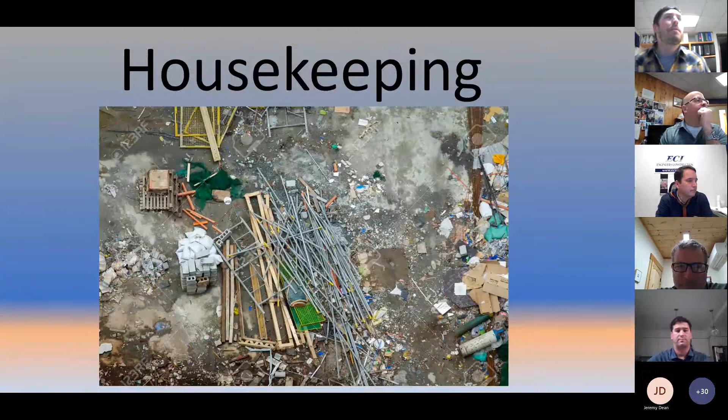I'm talking about housekeeping today. Poor housekeeping can result in tripping over loose objects on the floor, stairs, platforms, or ground. You can be struck by any falling objects that are just laying around above you. Again, slipping on wet surfaces - greasy, wet, dirty.

Poorly stacked items or misplaced materials can start to build up. If we get right now, this time of year, we could get a foot of snow next week. So if you have stuff all over the job site and it's a mess right now, and it snows on it, it's going to become pretty dangerous because you can't see what's under the ground, under the snow. It's also going to be challenging to find materials and tools and things you need because the snow is just covering it up and you're unsure of where it is.

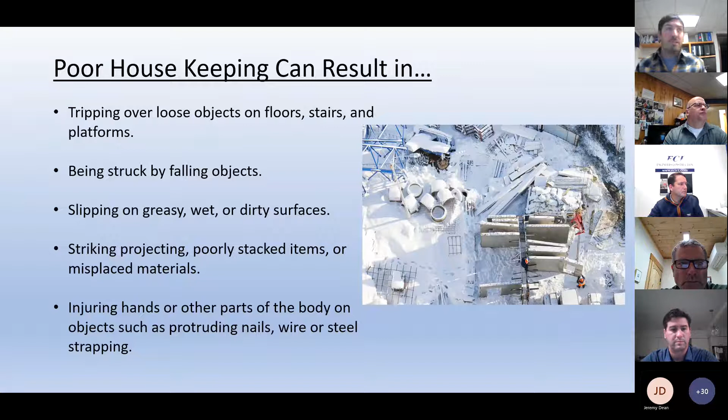Benefits of good housekeeping: you're going to need to handle materials less, you're not going to be searching around looking for things, you're going to know where they are. There will obviously be fewer slipping and tripping accidents because the ground is clean.

Fire hazards decrease, dust and vapors decrease if the ground's cleaner, the floor's cleaner. It's going to allow you to use the available space more effectively, and your tools and materials will become easier to find. It's also going to improve morale and productivity.

You're not going to spend time searching for things. You get to show up at the job site in the morning and be like, oh, it's nice and clean around here now, I like this. I kind of want to work here right now.

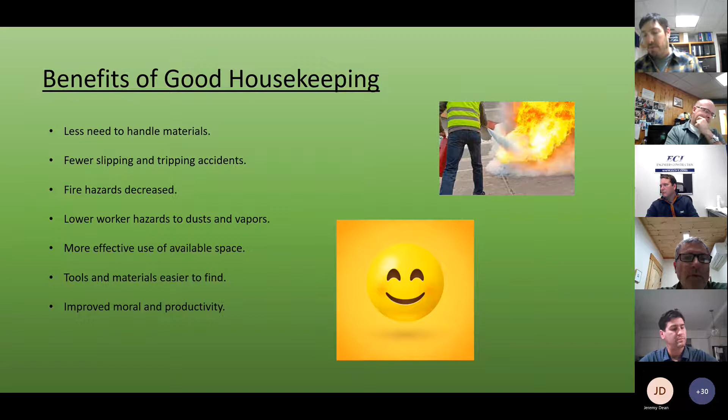Implementing an effective program, or just keeping the job site clean: clean up during the shift. If you're going to lunch or something, look down, you see some junk, some trash, just pick it up on your way and throw it in the trash bin. Things like that. Day-to-day cleanup - towards the end of the day, take a little time, everyone clean up a bit.

Make sure you have a good place to dispose of trash, whether it's a big dumpster for a big project, or just trash bins around, so you have places to put things. Remove any unused materials or tools, things that you just don't need that are taking up space. Try to keep your job sites clean - that's really all I have.

Sounds good. Thanks, Austin. I think the backyard is kind of the same, it's an extension of a project and it has the same needs. So when I walk around my property or out in the backyard, I'm thinking and looking at things, and visioning it this time of year with a foot of snow to say, uh-oh, I better put that away, or that should get covered up or rolled over so there's nothing sharp sticking up.

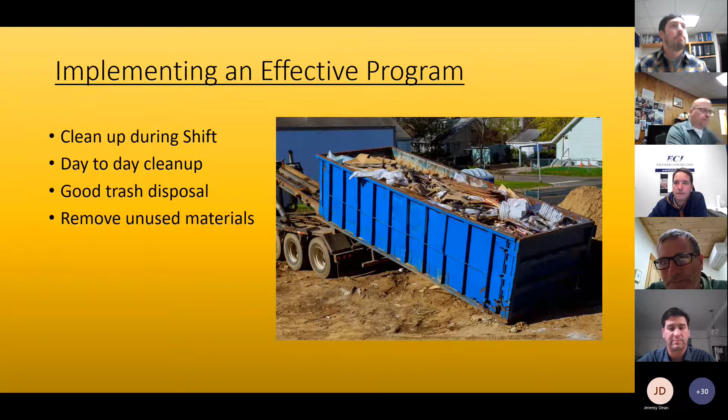And you're right, a clean job site is a good morale booster, and it gives a better appearance to the public, and everyone takes more pride in that. So I'll take over the screen.

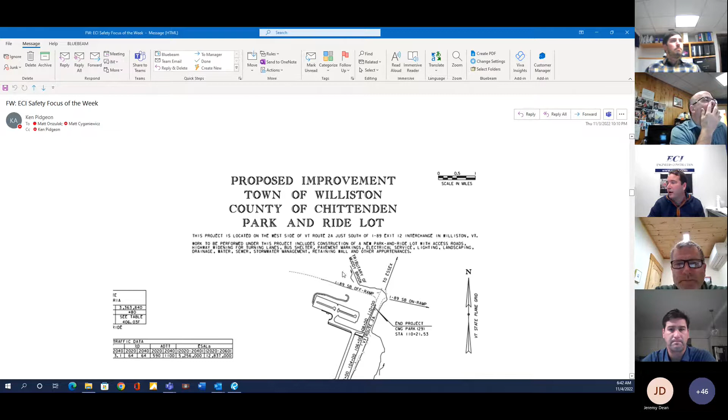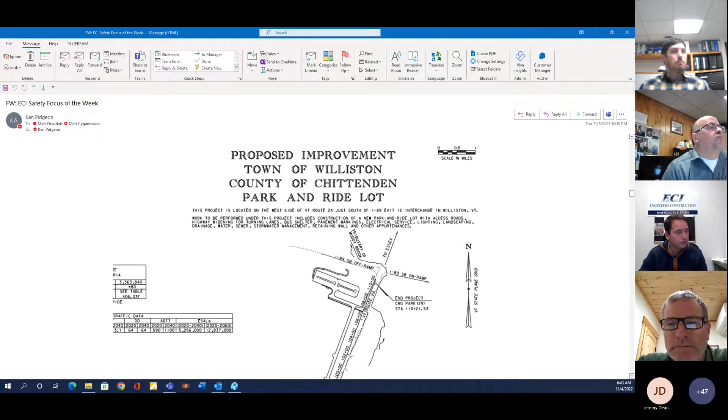So I'm pleased to be talking about the Park and Ride project. This is a VTrans project - we're contracted with VTrans. Work under this contract includes construction of a new park and ride lot with access roads, highway widening to add extra turn lanes, bus shelter, pavement markings, electrical services, lighting, landscaping, drainage, water, sewer, storm management, retaining wall, and other upgrades in the area.

If you guys can see my mouse - most of you probably have seen the project, it's a pretty viewable project. This is I-89, the interstate, and this is as you're going up to St. George Road 2A. The Park and Ride is here on your right.

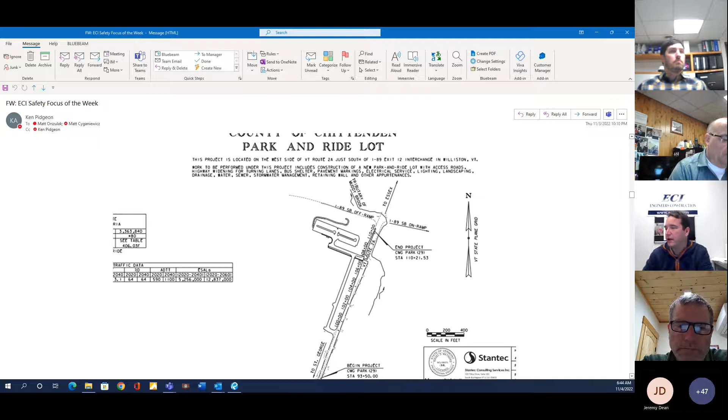This is what they're calling it - you're going to be able to enter one way, go into the park and ride, and then when you leave, they're calling this the exit road or frontage road, which we're constructing, and then you exit at the top, more of the top of the hill. I think because you're coming down that hill, they didn't want cars exiting on a blind spot coming down the hill - just speculation there. That's too close to the intersection, probably. Very close to the intersection, and it's a pretty busy intersection, as everybody knows.

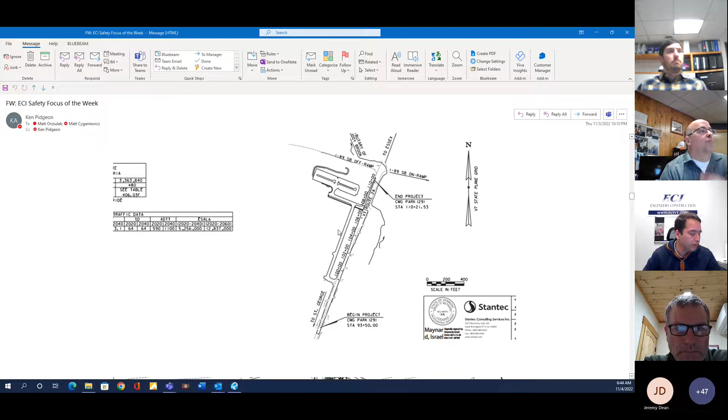This project, when we arrived, was all wooded. So basically untouched property, it's a quite unique project. I'll get into some of the specifics, like how much material we moved, the lighting, and all that stuff.

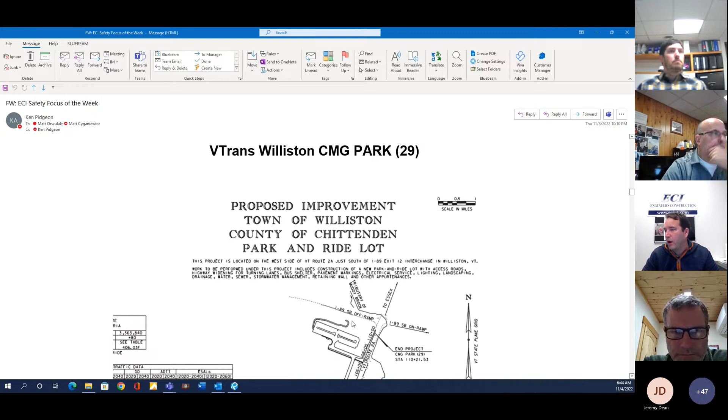This is one page reflecting the actual park and ride itself. There's a lot happening within this area, per the stormwater runoff permit. These are all swales.

Basically, the stormwater goes into these swales, and it's got a special type of soil in there that treats the water before it eventually gets discharged down into this dry retention pond. It basically should never hold water unless we get some crazy flood events, but it just kind of goes through here and out, and it's all treated by the time it gets down there. There's actually a hydrodynamic separator up here that'll help get rid of some of the trash and stuff before it gets treated through the soils.

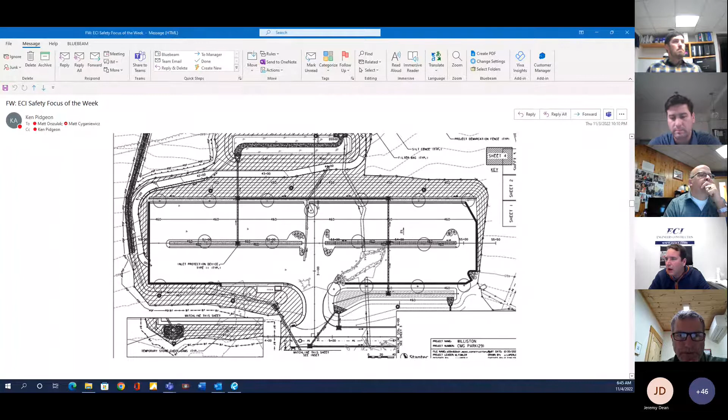Pretty extensive area. There's a maintenance access road that goes around here with a retaining wall. It's just a little access road so they could work on this pond. There's a structure that they'll probably need to clean out for maintenance to get down there. And then the park and ride itself.

Within this, there were 14,500 cubic yards of excavation, a lot of earth moving. To replace that, there's 13,000 cubic yards of select material, meaning sand, dense grade. I didn't account for the pavement, but also pavement. Over 632 new tree plantings and shrubs. That's what these circles are here, trees.

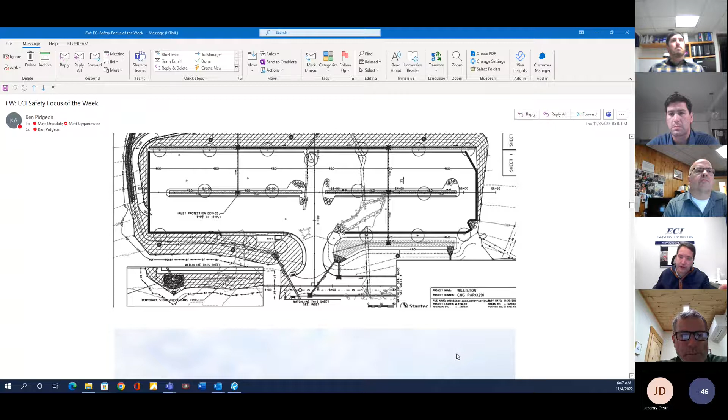There's trees in this bioswale, and on another sheet there's a bunch of trees along 2A. There were 6,000 lineal feet of conduit, 37 street light assemblies. We cleared 12 acres of property, 6 on the park and ride and 6 for the BGS section, which we just had to clear, and then it's taken over by somebody else to finish the work.

So this is a good picture. This was taken in the median of the interstate, looking west I guess, at the park and ride. Basically all the trees were laid down. Mostly south, I'd call that looking south, right?

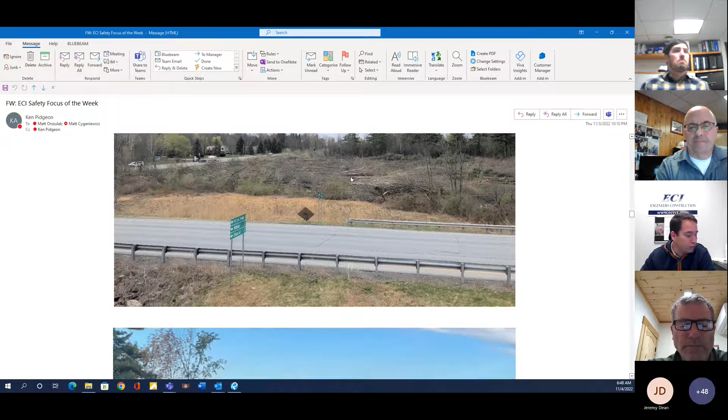Yeah, they weren't really any trees worth of value. They pretty much chipped them all and sold them, probably to Burlington Electric. So nothing was wasted, it's all going to be chipped and used for good energy. A pretty cool picture, and this is when it set up a lot of red flags. This was all tree cover, and then they see this, and everyone's like, 'Oh, what's going on?' It's 12 acres, so it's a pretty big site.

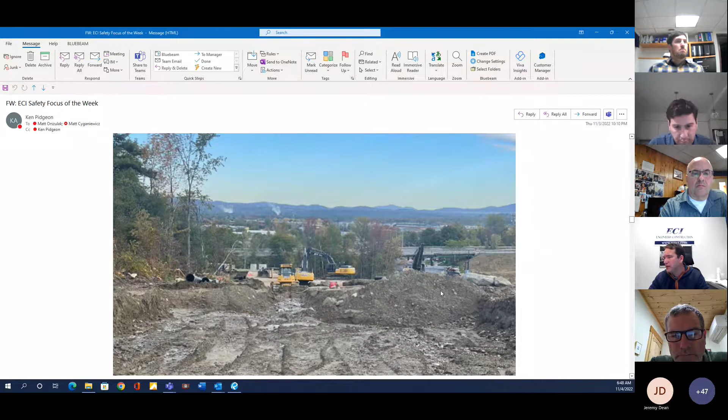This is a picture looking down from what we're calling frontage road. This was a wet day, but you could see the nice view in the background. There's 89 and the underpass, which would get us up to the park and ride. Really nice views.

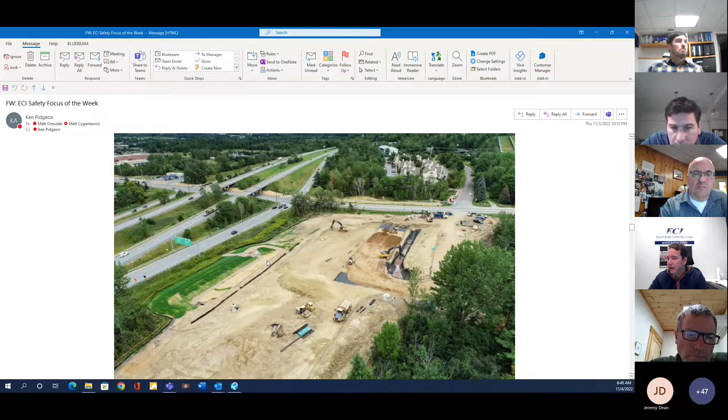This is a great aerial shot, this is when we're working the park and ride. The other picture was taken up here looking down frontage road this way. This is the dry retention pond that is complete at this time, all matted. This is specialty grass, very expensive seed for the dry retention area. Can't see the wall, but the access road is at 100%.

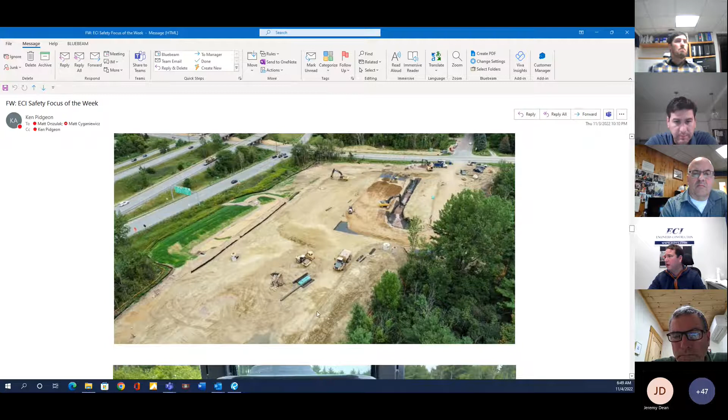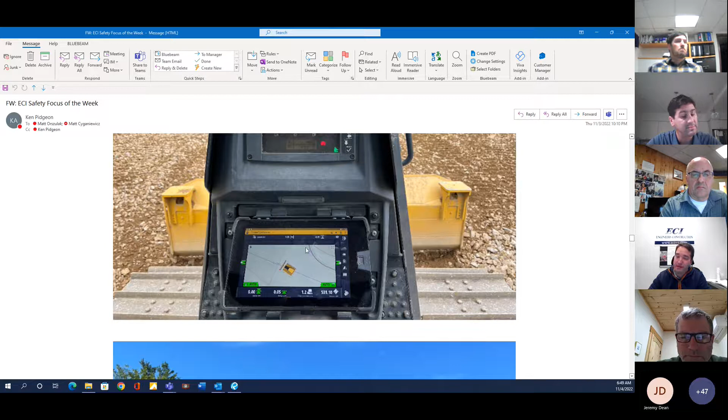Oh, this is, they have GPS set up in the dozer, so I was lucky enough to get a couple moments in there to check it out. Very cool setup, it actually moves the blade up and down however you need it done. I moved it around a little bit, the guys let me move it around a little bit. Very cool how it works, and it makes production a lot faster. We can move and place the select material very quickly.

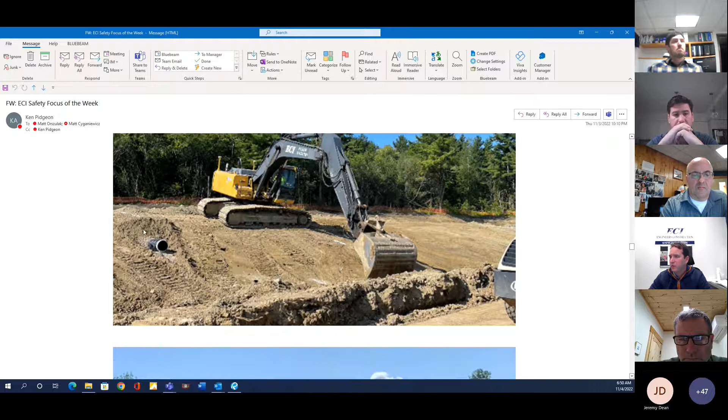This is a picture of us working a slope. This is a head wall that'll eventually connect to a pipe that'll dump out into a swale that goes all the way around. We had the haul trucks here because of all the dirt that needed to be moved on site from one location to another to be reused. And then there's a dozer again.

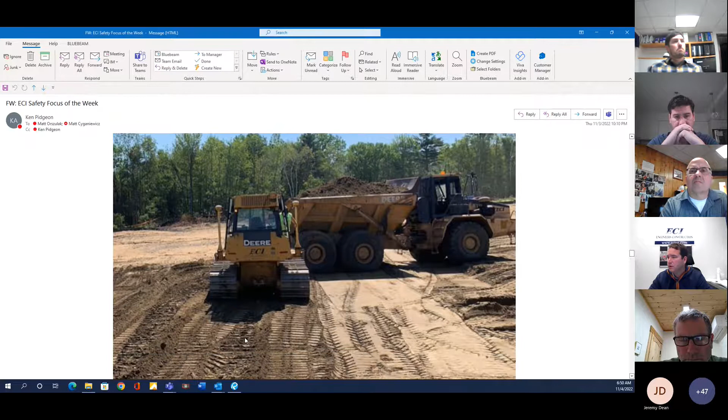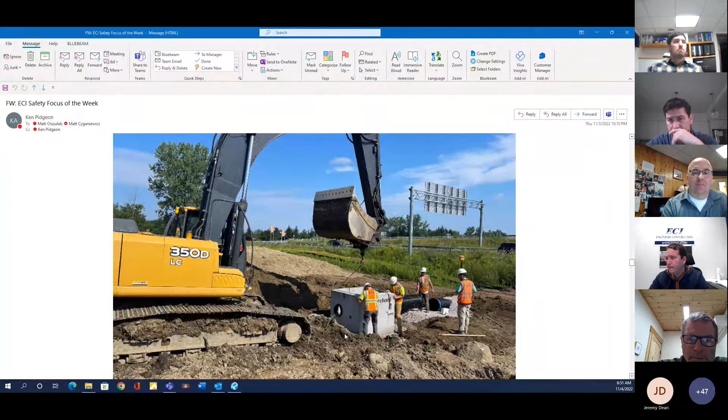Got the 350 setting the structure. This is work on the retaining wall. This is the maintenance road. And they're starting to build the wall there. Some of our GPS equipment - basically one base runs the whole site.

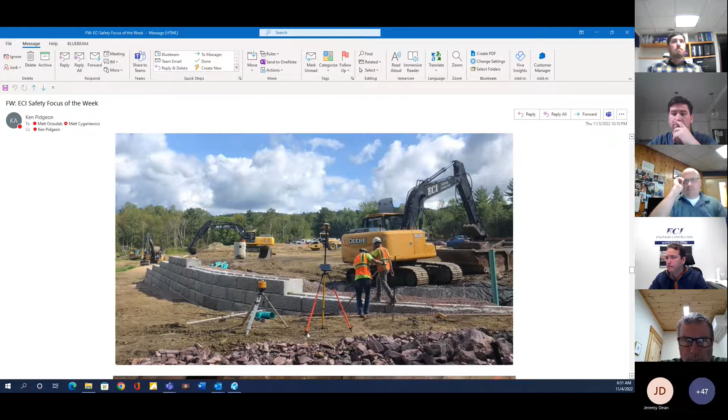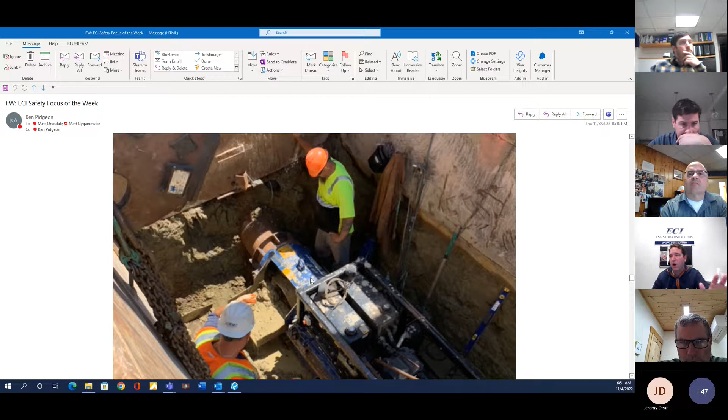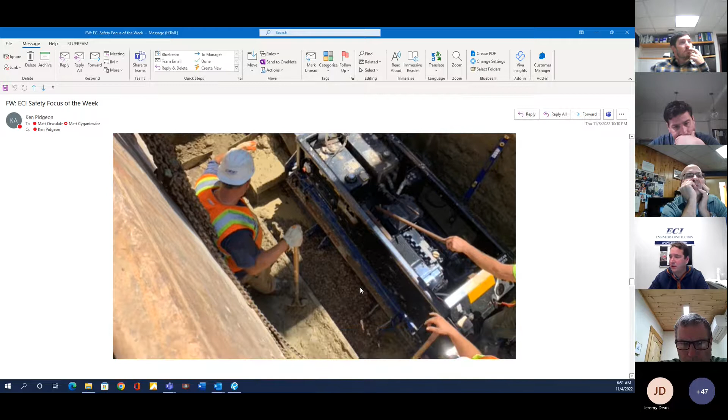This picture was more in the beginning. We had a water line for the BGS building, Bureau of General Services, that needed to be run across. We decided to auger bore and put in a steel sleeve for the water line under the road. Very successful - all the guys really worked together, and it was pretty amazing to see it all fall into place.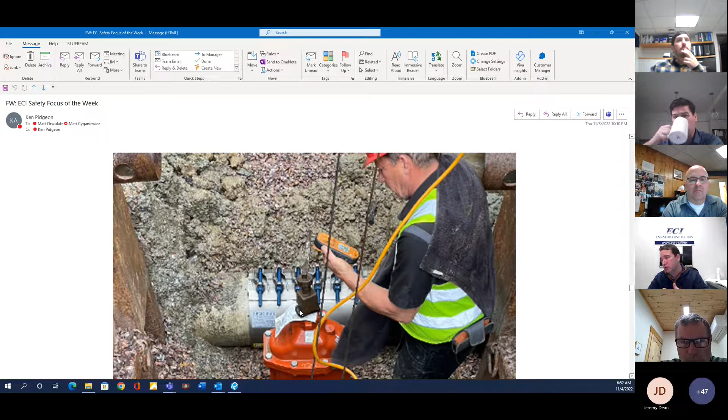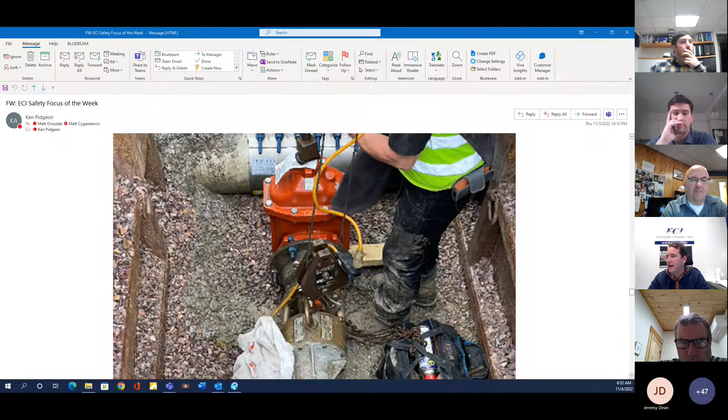This is Mike Dougal. So this is a 10-inch AC water line that we actually had to tap into. We have one more tap we haven't done yet, below, more towards the park and ride itself. This is up towards the BGS building. I'm sure you guys worked with him in the past - 8-inch water line, 8-inch gate valve on a 10-inch AC tap. Very cool to see that done.

This was pretty unique, and it's kind of multiple pictures. So we had 37 light poles with 37 bases, and the parking lot is pretty well built up at this time. These are 8'6" foundations with 30 inches sticking above the ground, and we didn't want a big excavation. So what we did was we pushed in a steel casing bigger than the foundation, augered it out, and dropped the new foundation in.

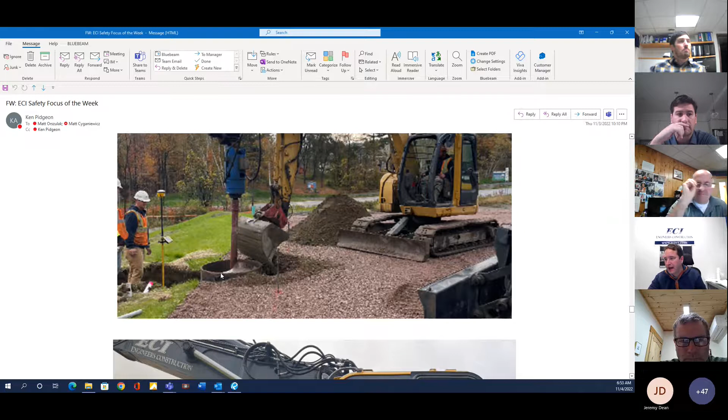We used what I think we're calling the pogo stick - it's like an air-powered compaction device to compact this and raise the steel sleeve up. That allowed us to connect the conduits to the bases, really slick. If anybody's on here wants to chime in, they were pretty productive with these - there were quite a few of them to put in.

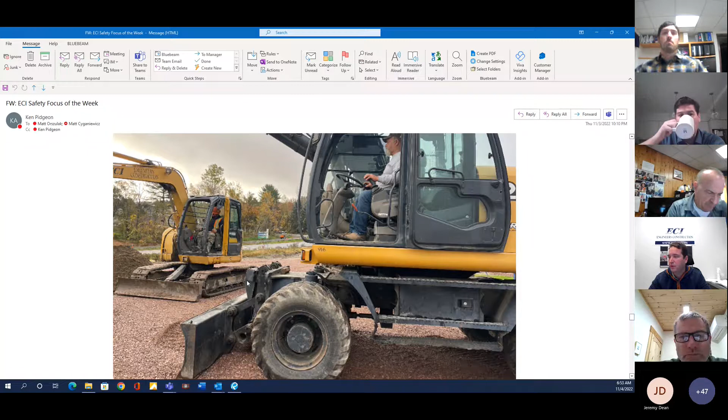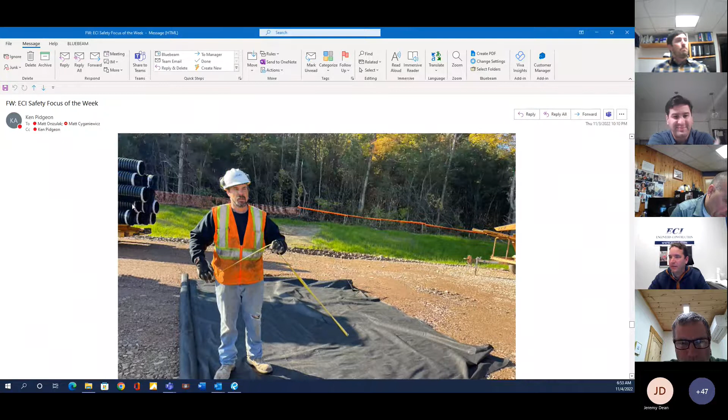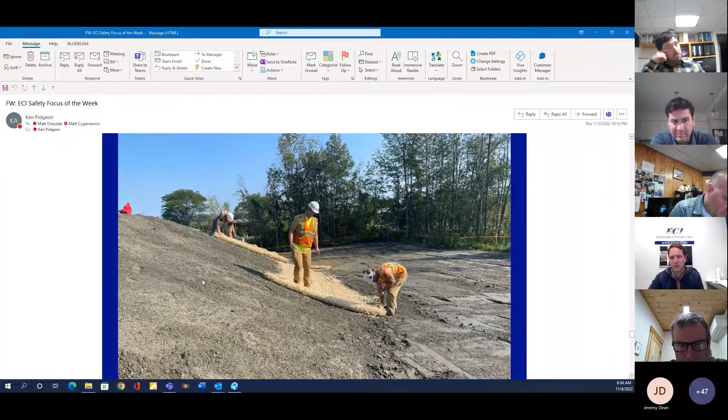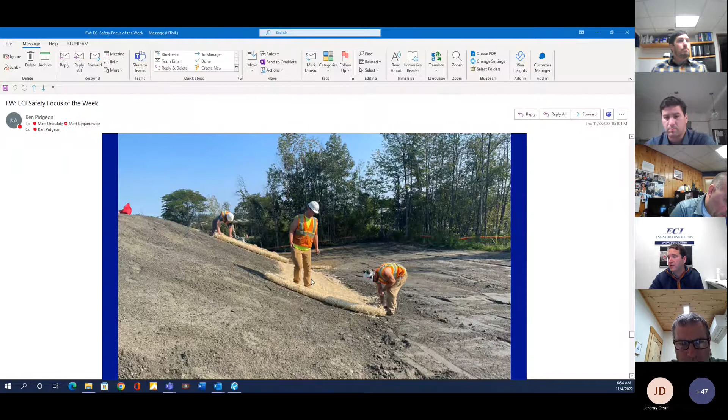Richie Munson measuring out some fabric. You can see the drainage pipe in the background there. These guys were working a slope. This is the new, I think we're calling it, man-made topsoil. It's pretty unique, it grows grass very quickly, and it's very cool because it holds well on these slopes. I think it's been a success so far. These guys are just seeding and matting, getting it all stabilized.

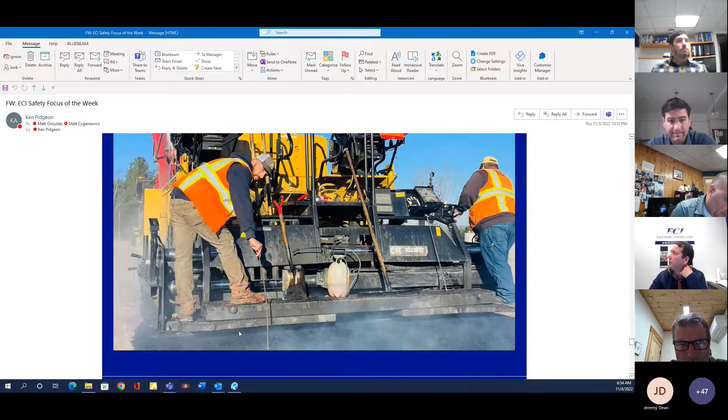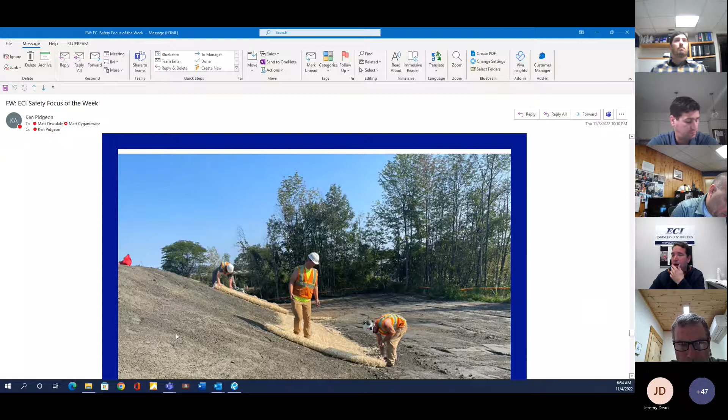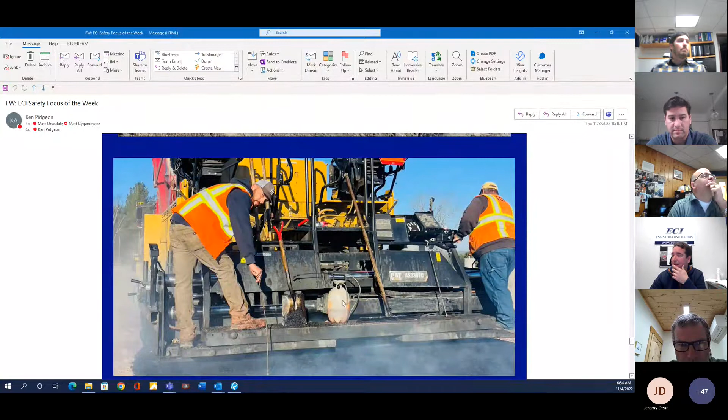So starting yesterday, Thursday, the parking lot area was ready - fine graded, ready to pave. All the slopes were done, drainage, all that stuff for the park and ride was in. So it was a perfect time, beautiful weather, to start paving. So I have the guys here checking depth - this is just base to kind of seal everything in for the season. I figured they'd get half done yesterday, but they got three-quarters of it done, so they'll finish it up today. Very, very good job - met all compaction specifications.

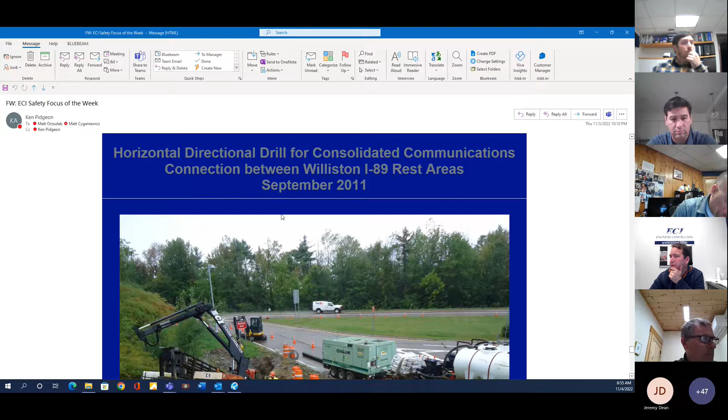And this is the horizontal directional drilling for Consolidated Communications, between Williston I-89 rest areas, September 2011. Got the directional drillers - using an air hammer to drill through rock from one side to the other. It's a communication connection for Consolidated, connecting the two sides.

They had a contract with VTrans, I believe, for communications, so we put a sleeve through to the other side. That's from the southbound rest area, shooting towards the northbound. The air compressor there is an air hammer for the downhole hammer that runs off compressed air.

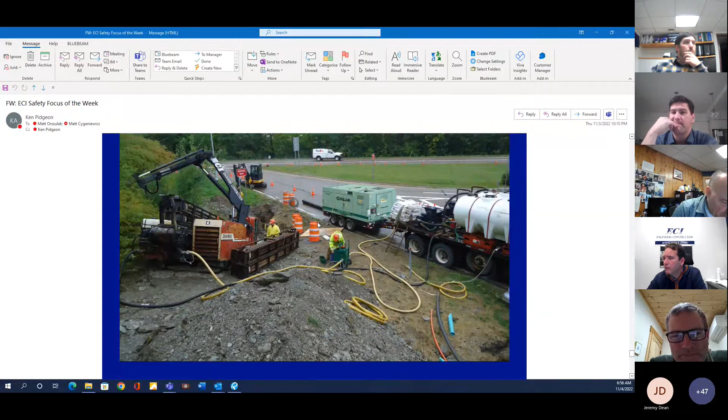Well, 2011 - very, very nice presentation, Matt. And just so everyone knows, it's not complete - we still got to go up frontage road, do some widening on 2A. But the crews really did a great job working together getting it done. We're very much ahead of schedule at this point with this project, and it looks good. It's very viewed - everybody drives by it on the interstate, and everybody I talk to says, 'Oh my God, that's looking so great.' So props to the guys and the crews, everybody involved.